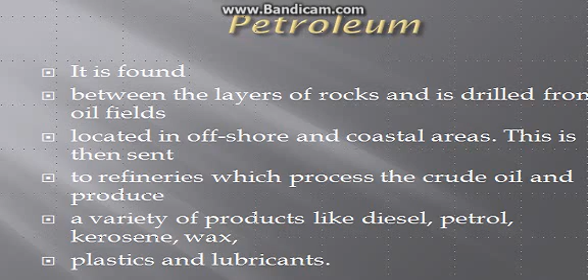Natural gas is found with petroleum deposits and is released when crude oil is brought to the surface. It can be used as a domestic and industrial fuel. Norway, UK, and Netherlands are the major producers of natural gas.

Now we look upon hydel power. Hydel power is produced by dams: rainwater or river water stored in dams is made to fall from a height, and the falling water flows through pipes inside the dam over turbine blades placed at the bottom of the dam. The moving blades then turn the generator to produce electricity.

Major producers of hydel power are Paraguay, Norway, and Brazil, and in India it is produced by the Damodar Valley project and the Bhakra Nangal project. The installed capacity of hydroelectric power was 587.4 megawatts in 1950-51, and now it has increased to 19,600 megawatts.

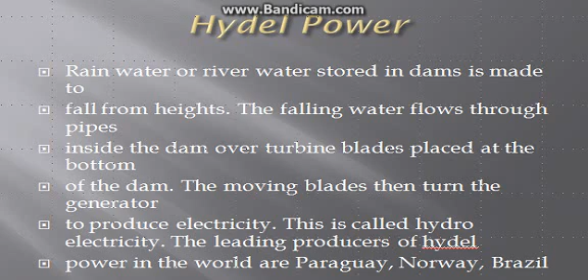This is the picture of how we make hydel power: rainwater or river water is stored in a water reservoir, with a turbine and generator. The falling water flows through pipes inside the dam over the turbine, and blades placed at the bottom of the dam. The moving blades then turn the generator to produce electricity. This is called hydroelectricity, and the water discharged after generation is used for irrigation.

One-fourth of the world's electricity is produced by hydel power. The leading producers are Paraguay, Norway, and Brazil, and Norway was the first country in the world to develop hydroelectricity.

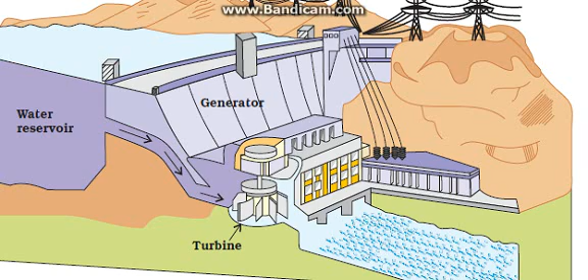Coming down to non-conventional sources of energy, these are also known as renewable sources of energy. They include solar energy, bioenergy, tidal energy, and wind energy.

Solar energy is inexhaustible and non-polluting, but the disadvantage is that it's expensive and a diffuse source, so it gets wasted.

Tidal energy is non-polluting and inexhaustible, but the disadvantage is it destroys wildlife habitat and is difficult to harness.

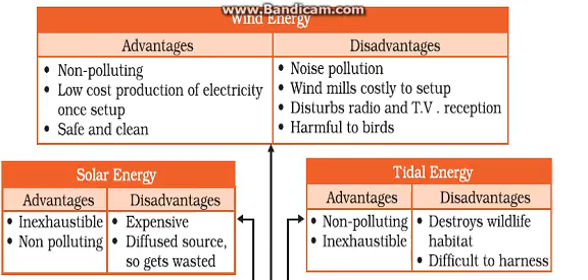Wind energy is non-polluting, has low cost of production, and is safe and clean, but the disadvantage is noise pollution. Windmills are costly to set up, disturb radio and TV reception, and are harmful to birds.

Nuclear energy's advantage is that it emits a large amount of energy, but the disadvantage is it generates radioactive waste and is expensive.

Biogas is low cost, easy to operate, and makes use of bio waste, but causes greenhouse effect. Geothermal energy is clean, eco-friendly, and always available, but the disadvantage is that sources are located far away from cities.

So it's costly to transport the electricity. These are the non-conventional sources of energy, but the most important is solar energy.

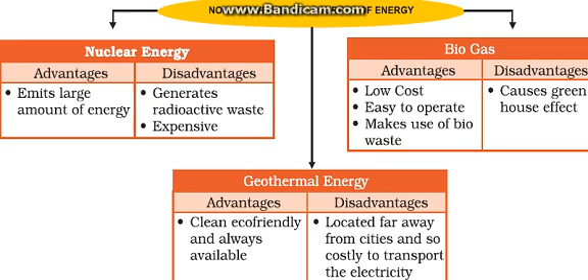Solar energy can be used when there is sunshine, a lot of sun, but in cold weather we can't use the solar cells.

Now wind energy - wind is an inexhaustible source of energy. Windmills have been used for grinding grain and lifting water since ancient times, and in modern times, high speed wind rotates the windmill, which is connected to a generator to produce electricity.

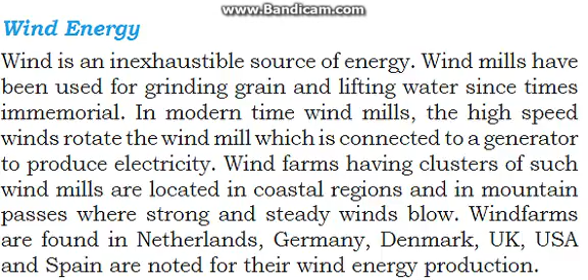Wind farms having clusters of such windmills are located in coastal regions and mountain passes where strong and steady winds blow. They are mainly found in Netherlands, Germany, Denmark, UK, USA and Spain, noted for their wind energy production. I have taken all these things from the NCERT book.

Now we come to nuclear power. Nuclear power is obtained from the energy stored in the nuclei of atoms of naturally occurring radioactive elements like uranium and thorium. These fuels undergo nuclear fission in nuclear reactors and emit the power.

The greatest producers of nuclear power are the USA and Europe. In India, there is Rajasthan and Jharkhand, and thorium is found in large quantity in the monazite sands of Kerala. So, nuclear power stations in India.

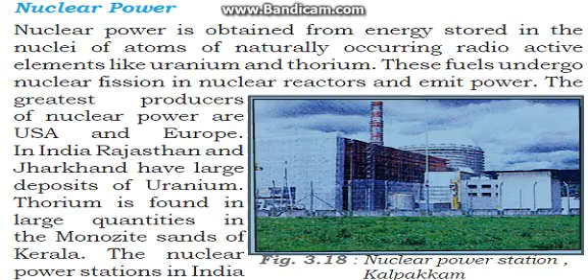This is the picture of the nuclear power station Kalpakkam.

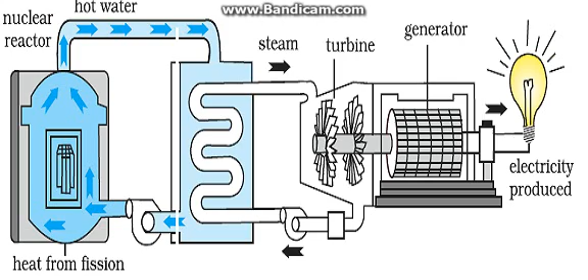There is a nuclear reactor and heat from fission, then hot water which becomes steam, which turns the turbine, and then they generate the electricity. When the generator moves, they produce the electricity. This is all how nuclear energy is made.

Now we are coming to geothermal energy. How is geothermal energy produced? Heat energy obtained from the earth is called geothermal energy. The temperature in the interior of the earth rises steadily when we go deeper.

Sometimes this heat energy may surface itself in the form of hot springs, which produce steam and generate power. Geothermal energy in the form of hot springs has been used for cooking.

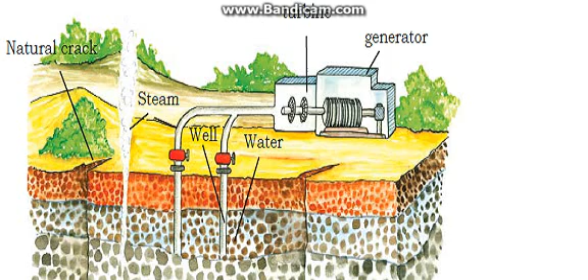This is a natural crack where steam is transformed to the well. Then there is water, and when the turbine is moved, there is a generator.